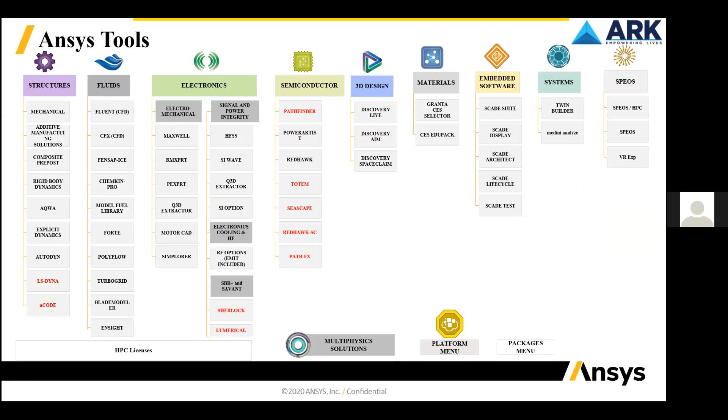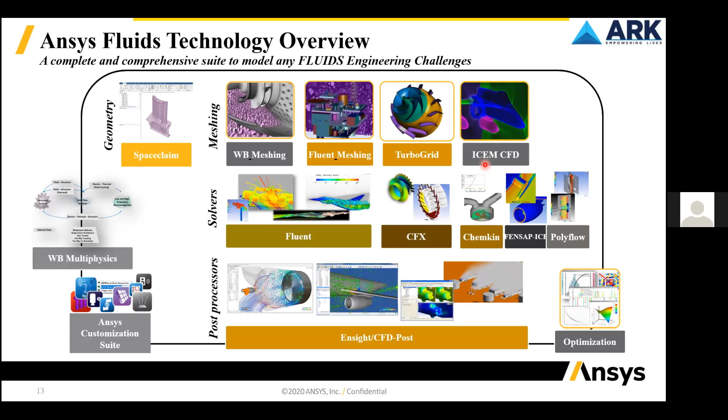And we can say that is one of the very best advantages that we have for using the workbench. Okay, then talking about the electric vehicles.

So for electric vehicles, engineering systems, there are multiple systems, or we can say the subsystems, are involved in case of the vehicle. So this simulation impacts all the critical areas of ground vehicle development.

Talking about the exterior, we have aerodynamics, aeroacoustics, thermal management, water management and soiling, then structural integrity. Talking about the interior, we can go for climate control or HVAC, then cabin acoustics, passengers comfort and safety, ergonomics, electronic reliability. So these are the various things that can be simulated for the interior of the EV.

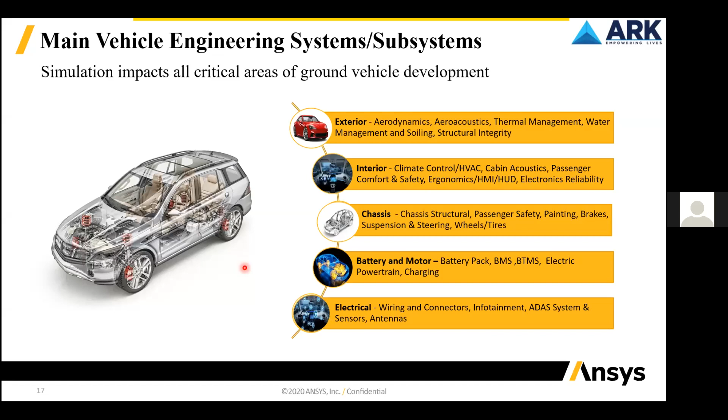Then we are going to focus on the exterior. Since today's topic is about external aerodynamics, right, so we are going to talk about the exterior part - where we have the simulation capabilities required to realize these benefits. So what are the benefits that we can get with the help of ANSYS for the simulation of the exterior part of the EV.

So first one, we have external aerodynamics - with the help of ANSYS Fluent, we can go for external aerodynamics simulation. Then again, we can simulate aeroacoustics problems in the same. Then we can go for thermal management, that is, we can simulate the battery for thermal management. I think we have this topic in tomorrow's session, so definitely we are going to discuss the battery thermal management system in that particular session, right? Then we have water management and soiling, then structural integrity. So these are the very important parts in case of the exterior system that any vehicle has.

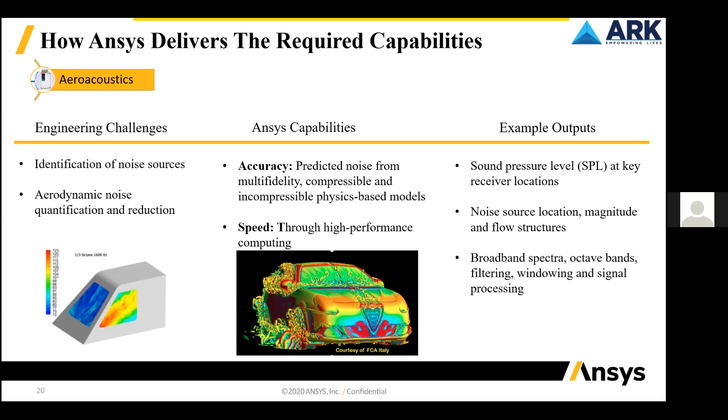Okay, then water management and soiling. Economic and repeatable water management and soiling needs to be done. Then quantifying the effects of water and soiling on sensor performance needs to be found out. So here we have the accuracy, where we can go for the extensive multi-phase model, with the help of which we can very easily simulate these water management problems.

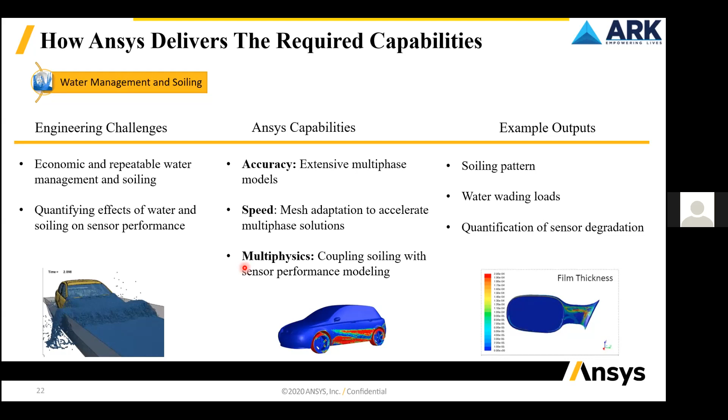And then here we can get results like soiling pattern, water wading loads, quantification of sensor degradation. So how those things can be easily found out over here.

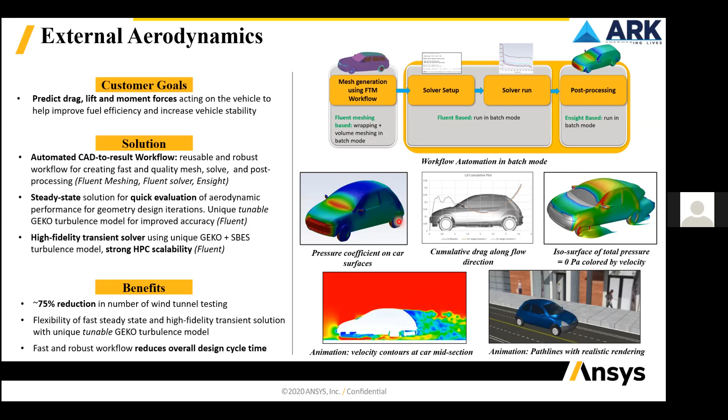Now how do we need to start the simulation in case of an external aerodynamics problem?

First of all, for the geometry, you may take a clean geometry into SpaceClaim, or if it's not clean, then you have to do the geometry cleanup in SpaceClaim. Then you have to set up the name selection for the different boundaries.

Then you have to take that clean model and transfer it into the watertight geometry workflow in Fluent meshing. Again, we can create a mesh for that model.

If you want, you can save the same mesh workflow for any future mesh edit or mesh automation. If you are going to work on multiple cases in the same way, you can save that particular workflow as well. Then you can load that mesh into Fluent and solve the problem.

Then you can save this complete simulation workflow in a journal file, so for future simulations it can be used as automation. You can directly call that journal and it will automatically give you all the inputs you have given.

Then post processing can be done in Fluent, and that can be exported into ANSYS Ensight or CFD Post, where we can do the post processing. Now I hope you understood the complete idea of how exactly we need to start with the simulation.

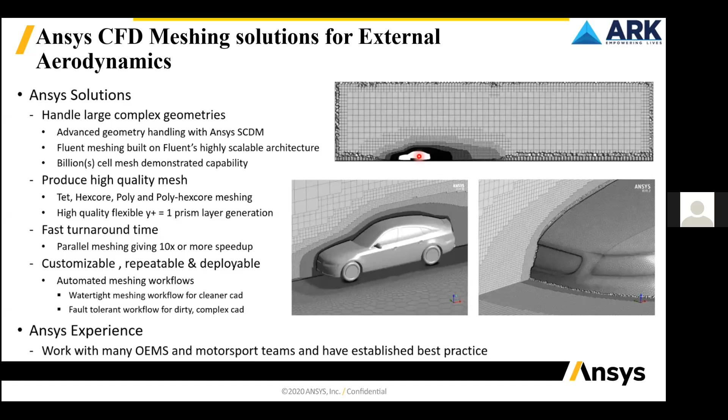So with this, I will give you a quick introduction about the Mosaic mesh. Just have a look at the video.

Are you getting audio? Can someone confirm? Yes sir, yes sir, continue. Okay, okay.

The world around us, its nature, its detail, its beauty, its design, all come through in an elegant and accurate expression of reality. And like great art, great engineering demands its own set of solutions to paint the perfect picture. Introducing Mosaic from ANSYS, solutions that optimize the mesh everywhere, solutions that don't compromise accuracy for speed. Automatically connecting any type of mesh using polyhedral elements for fast and accurate flow resolution without compromising the ability to place the optimal mesh in every part of the volume. This powerful new Fluent experience delivers higher quality cells 45% faster while requiring 30% less memory. Already the most widely used and dependable CFD simulation tool in the world. ANSYS Fluent now easily and quickly conformally connects any mesh type, complex geometries, and flow regimes, allowing you to explore more materials, more variations, more possibilities. And like all great works of art, simplicity, beauty, authenticity, they fit together perfectly and show us the promise of a new tomorrow.

Okay, so I hope you got an idea about this Mosaic mesh technology that comes with ANSYS Fluent, and it's really helpful to create a mesh. Now you can very easily transfer the model directly from SpaceClaim to this watertight geometry workflow. You can see this option where you can directly transfer the model to ANSYS Fluent Meshing.

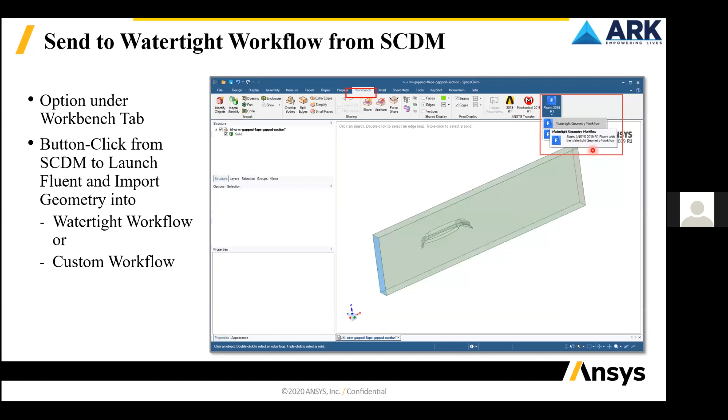Now here you'll be having two different task-based workflows: one for watertight geometry and another for fault tolerant geometry. Both are easy to use, with best practices enabled at each task. Whatever options are required to complete any meshing, in case of watertight or fault tolerant workflow, are already added there. You just have to follow the given steps and you'll be able to get a good quality mesh. The workflows are also customizable, so you can even add any other specific data if required.

Again, for no watertight geometries, for dirty or non-watertight geometries, it works with the help of wrapper technology. It actually encloses any holes or gaps, and automatically we get a complete watertight model in the Fluent Meshing itself. So there's no need to try to make it a watertight model separately.

Both workflows are efficient for parallel meshing. The only prerequisite for the watertight geometry workflow is that you should have a clean watertight geometry, whereas in the fault tolerant workflow, it is not required to have watertight geometry—if it's not watertight, that's fine too. It also automates with a Python based journal file, so you can save this as a journal file as well, making it fully automated.

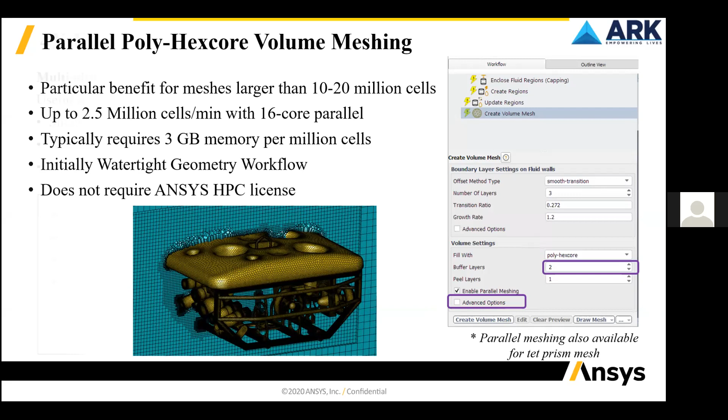I'm just discussing the EV section only, so whatever I'm discussing is specifically very important with respect to EV. Another part we have is the electric motor meshing.

For electric motors, meshing can be done 4 times faster. This is one of the important add-on parts in case of fluent meshing. Again, for battery simulations, it creates a very good mesh, and you can also do mesh copying.

If you see any battery pack, it consists of a number of cells. If you know electric vehicles, they have multiple battery packs in the bottom side. In each battery pack, there will be hundreds of cells, and those will be exactly identical to each other. So in that case, you can copy the mesh from one cell to another.

It works in such a way that you can create mesh as fast for hundreds of cells as you can for one. You just need to create a mesh for a single cell and copy it to the remaining identical cells. It's just copy and paste for the remaining cells, so very easily it creates the mesh.

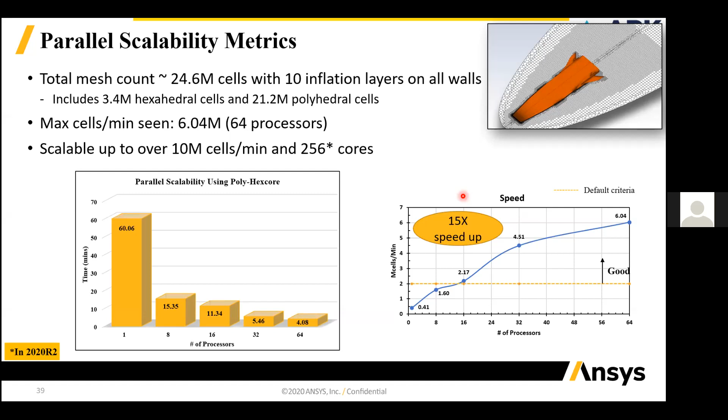Parallel scalability works really great for different problems as well, so you can get millions of mesh in very little time - 10 million cells per minute with 256 cores. If you've already worked on different problems, you'll understand the time taken to solve them, so this is really helpful. You can get 15 times faster mesh with ANSYS fluent meshing. This is one example where we are going to solve the same kind of example.

So you can see this is how the mesh is being created. You can see this particular layer here, where you will be having this mosaic mesh. Then near the wall you'll be having the hex polyhedral elements, and these are the hex core elements that you can see over here.

Talking about ANSYS Fluent again, which is the industry leading computational fluid dynamic software known for its advanced physics modeling capabilities, giving industry leading accuracy. It accelerates the processing from CAD to mesh to accurate results, with features that increase productivity while enabling more innovation, but never compromising on results. So definitely this is a really good tool that we have here.

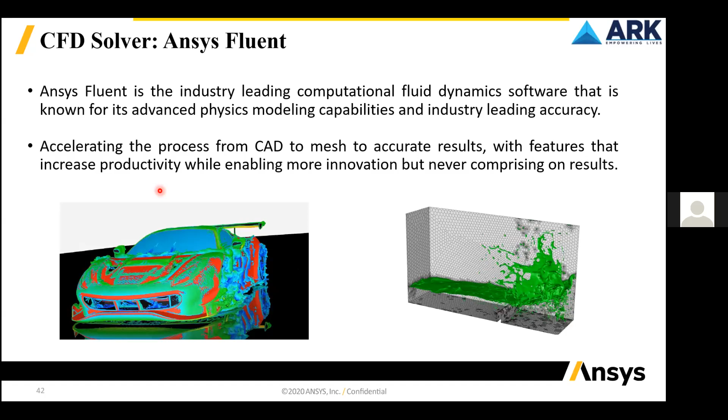Then talking about the different turbulence models in ANSYS Fluent that can be helpful for the EV side. Based on the type of problem we are considering, we have different models. Generally we use the one or two equation RANS models, that is Spalart-Allmaras, K epsilon, and K omega. All these models are available over here.

Again, if you wanted to go for unsteady problems, we have the scale resolving simulation methods, where we have LES, DES, SAS. So different models are possible for unsteady problems as well.

Then we have GEKO, as I told, that is the generalized K omega turbulence model, which is very important over here. This GEKO, developed by ANSYS, is a new turbulence model family, from the family called generalized K omega model, with the goal of turbulence model consolidation.

GEKO is a two equation model based on the K omega model formulation, but with the flexibility to tune the model over a wide range of flow scenarios. This is very important in case of flow, or we can say results in the critical area, so definitely that can be helpful.

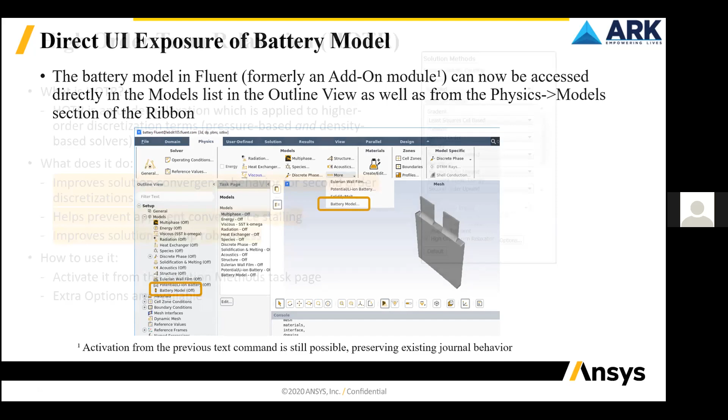Again, then high order term relaxation, that is HOTR, which is applied to higher order discretization terms, that is pressures - it can be pressure based or density based. What it does is improve the solution convergence behavior for second order discretization, when we go for second order discretization in the solution method.

Again, it helps to prevent apparent convergence stalling, and improves solution startup robustness, giving more smoother results we can say. It can be directly activated from the solution methods task page, and there are some extra options also available inside this.

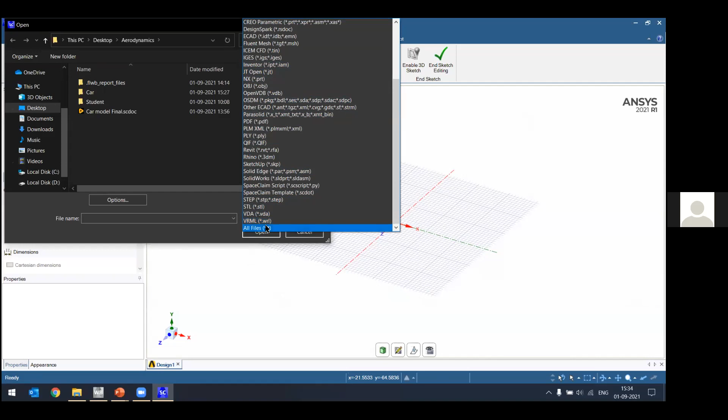So to start, I'll go to the file and import that file. You just need to go to File, Open, and in the open dialog, first change this filter from .scdoc, which is the SpaceClaim file format, to all, because we are importing the standard files, not from SpaceClaim. Select this 'all files' option, then just browse to the folder where you have downloaded it.

I have the file downloaded over here, so this is cad_c_car.x_b, a parasolid file format. Select this and open it. As you can see on the bottom side, it will open that complete file over here, the status shows it is importing.

Okay, so the file is imported. You can see this is the car model that we have over here.

Now first of all, we need to understand what could be the different data losses over here before starting repairing that particular model. So here we are going to create a complete watertight model, then create an enclosure around it, and then we'll be moving to the meshing.

Let's see over here. If I'll just go to this repair tab. Before that, if you see in the structure side, here we have two surfaces over here. First thing what you need to do is observe where these are located. You can see this surface is reflecting separately, and this is another surface, right? So first thing you can observe that both the surfaces are splitted.

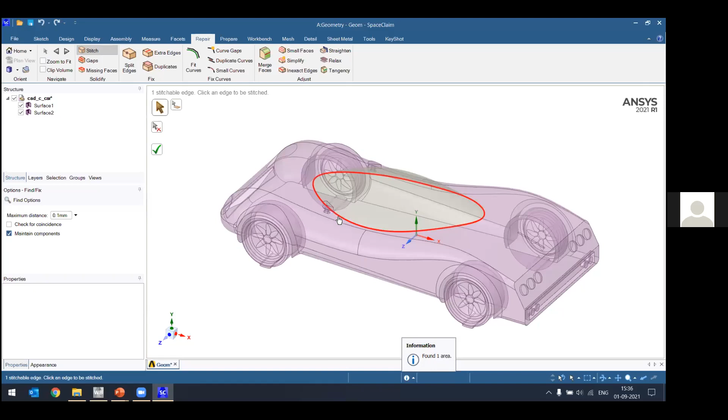So you need to stitch them together. For that we use this stitch option. Select the stitch option, and it will show you found one area. Just click on it, or click on this green tick also. Both will repair this model. Now you can see it is repaired, and here you can see only a single surface. So the model is stitched.

Then check for the gaps. Here you can see again it is saying found 3 areas. Select the first one, repair it. If you want to repair all at once, just click on this green tick, or if you want to repair one by one, select one by one like this.

Once the model gaps are filled, then check for the missing faces. Here you can see it is showing found 6 areas where faces are missing. First one is over here, you can see it will start adding the faces. Second one is over here, and this face is missing. When you will add, you will get to see the face will be added.

Similarly here also you have to add the face, then right side, and here also a small gap will be there. I hope you can see this gap, so this is the face missing over here. And then the last one is over here.

As you can see, when I have added all the missing faces, the surface body is converted into a solid body. So we have successfully repaired all the faces.

Now what we need to do is we have to call the wing shape as well, but before that, still we have to repair this. Next one is the split edges, so you can see there are 15 edges which are splitted. So what exactly does this work? If we don't repair the model, what will happen? See, the meshing that we are creating will not be up to the mark. First of all, if it is not a watertight geometry, we will not be able to extract the fluid domain, so that is the first thing. Now second thing is, even if it is watertight but still having some other issues like a split edge or extra edge, that will lead to some bad quality mesh. So we have to repair that model before going for the meshing.

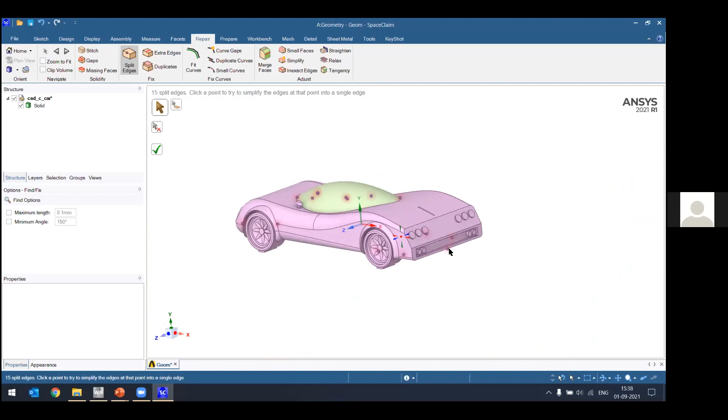So here you can see we have to repair the different split edges. I'll show you one by one. This should be a continuous edge, right, but it is splitted into two parts, so just combine it to one. Again over here, you can see it is splitted at this location. I'm just showing you, otherwise you can just go for all at once. Here also it is splitted at this location, also it is splitted, and then over here, and then here.

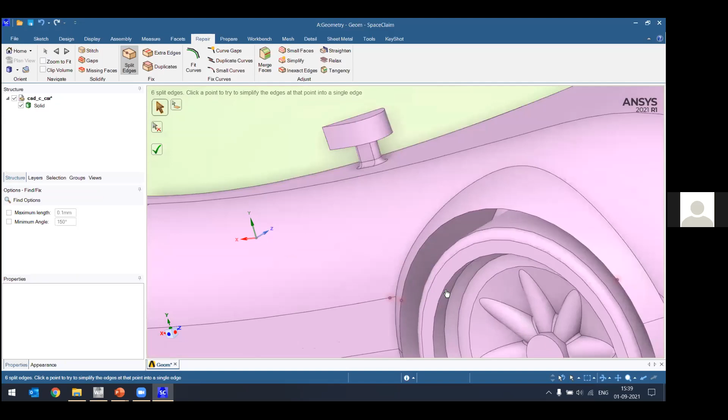Okay, all are repaired except this one, so it is not repairing. For now, just leave it as it is. Okay, then go for the next, that is extra edges. So no extra edges found. Any duplicate face? No duplicates are also found. Okay, so we have completely repaired the model.

Now we have to add the wing shape to this particular model. So for that you just need to go to this assembly and go to this file, so you can import another part, that is wing. Select this CAD wing and just open it. Again, it is a parasolid file format.

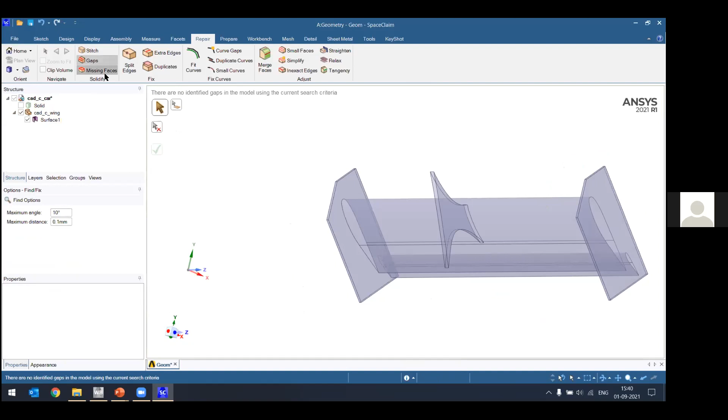So when we are importing it, again we have to repair that particular model as well. So I'll hide this car body, and I'll just show you this wing shape over here. Again we have to go to the repair and we have to repair the wing. So stitch, no gaps are there, missing faces, one face found. Just add it, and now you can say it is repaired.

But if you see this specific surface of this added surface, that missing face which is added, if you see how it looks like, you can see it is not a straight one. It is like this kind of wave shape it is taking. So that's why we have to first even repair this as well.

So for that, first of all we have to check other parts. No extra split edge, no extra edge, no duplicates. Now go back to the design.

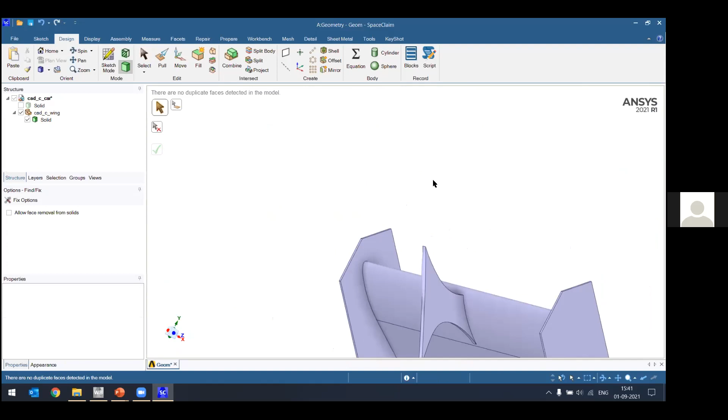Now what we have to do is create a surface or plane with which we'll replace this particular surface. So we have to replace this surface first of all. For that, first of all, we have to create a point. Now we can see here in this particular location we have 2 points, and at the bottom we'll create a point, and on this edge at the middle, or anywhere on that particular line.

Now we have to select a plane. We just don't need to create a plane, we have to build a plane. So select this build plane option over here, and then select these points so that you can create a plane which is passing through those points. And now third point, select. Now you can see this dotted line over here, so just select this dotted line so that the plane will be created passing through those 3 points.

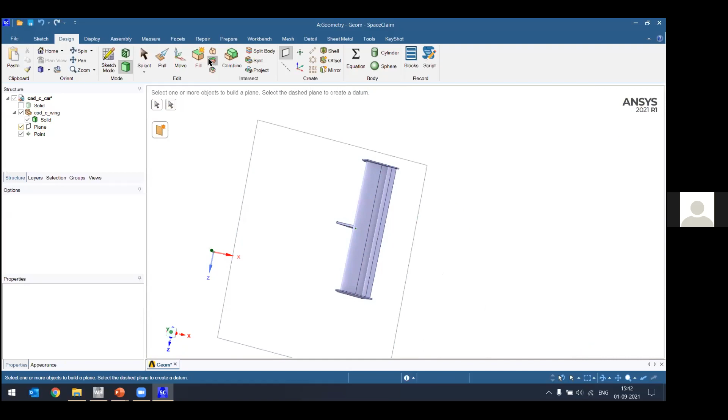So you can see the plane is created over here, and now you have to use this replace command. Select this particular shape that we wanted to replace, and then select the plane to replace. So automatically it will replace that. Here you can see target faces were replaced. Now hide the plane and hide the point as well, and here you can see it is a proper straight shape that we got.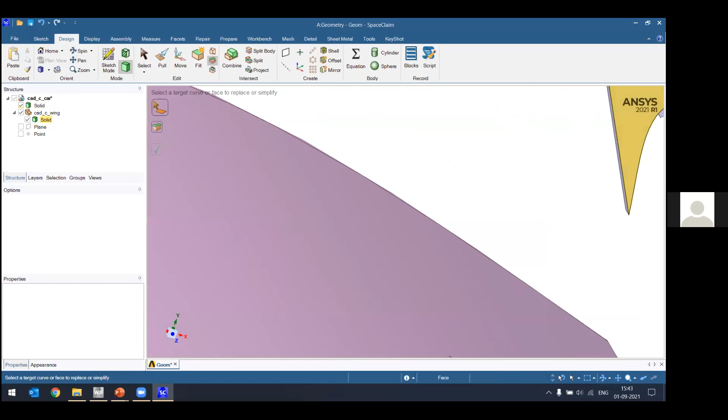As you can see over here, it is done, model is repaired. Now we have to attach it to the car body. Again for that we have to attach this particular part in such a way that this rectangular shape will coincide with this particular shape. This is how we have to attach it. So for that go to the assembly, sorry, not assembly.

First of all we have to create a plane along this rectangle again to make it align with that particular plane. This surface should be aligned to that particular plane. So again here also I'll just hide this wing shape. Here also we have to construct the plane.

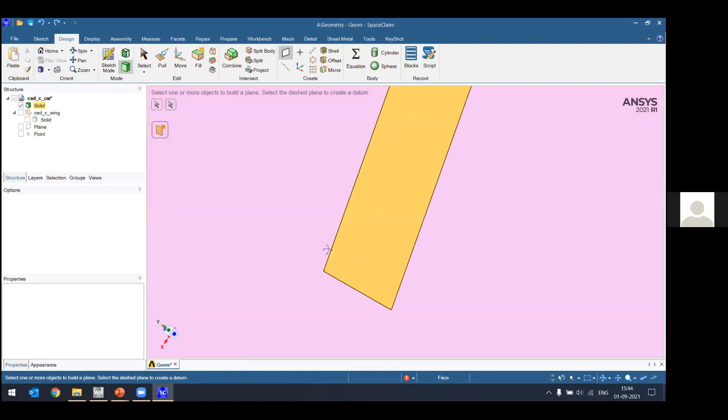So go to the plane and select the points, sorry, we have to select the construct plane option. So go to this plane option, go for the build plane, and then select this particular point, then this point, and then 1 point from this side. Okay, it's not detecting, so first of all we have to just make a point over there. So the point is created over here, and now, sorry, not created here.

And now just go for build plane, select this, so select the point, another point, and this point. Okay, so plane is created. Now sorry, plane is not created. Select this dotted lines to create a plane. So you can see plane is created.

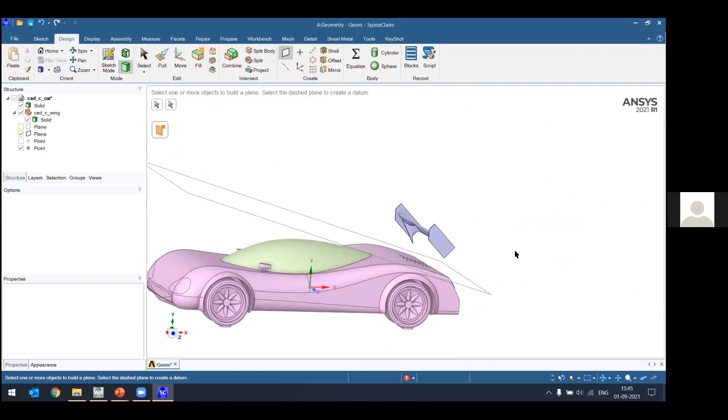Now again view this model and then go to the assembly and select the align option and select this surface and align it with the plane. You can see it will be aligned. Right now we have to move it and we have to position it exactly at this particular location.

So select the move command, triple click on any surface to do the complete body selection, then select the anchor and change anchor position to this location. Direction should be along this particular plane, right? So select the edge so that it will be along there. Now select the up to and select this particular point.

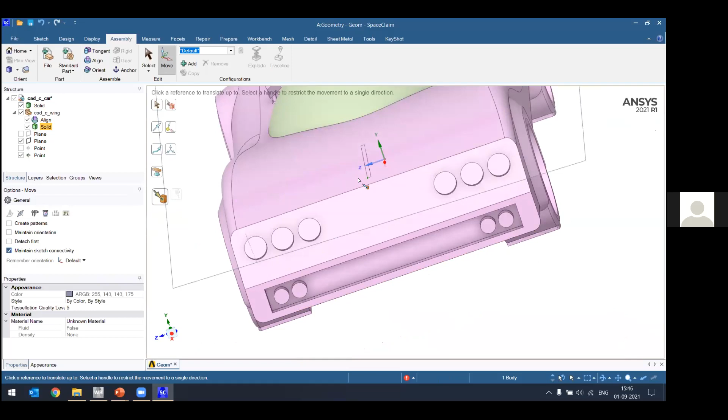You can see it will be positioned over here. Correct. Now we don't need that rectangular shape, so I'll just hide this plane. Select this particular shape. You should be in select mode.

Delete it. That patch should not be there. View the model, and now both are combined together, or we can say we have to make them as a single body now. So I don't need these points anymore, I'll just delete them.

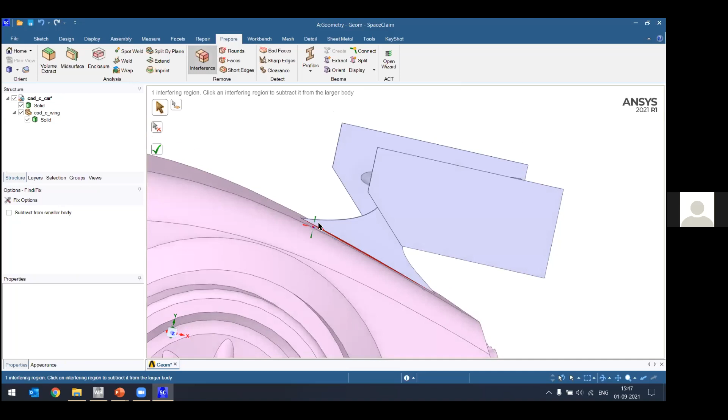Okay, all are deleted. Now go to prepare, then click on interference. Now when they are combined, you can see this shape of the wing, this bottom side we made it straight, but if you see this shape is not straight, it has a little curvature. So though we have aligned it at the points, in the middle it is merging with the another body.

So we have to remove the interference material. Just click on it and it will be removed. Once it is done, go to the prepare section and go for the enclosure. Sorry, not before that, we have to combine the model. Select the combine option, select first body, take combine option and select the second one. So you can see now it is combined.

I don't have anything over here, I'll delete this. So you can see the single body over here. You can rename this to car.

Okay, rename it car model. Done.

And now we have to create an enclosure. So go to prepare, select enclosure option and select the body.

Now we can give the dimensions. Let's say we'll give in the sides. I'll not create a much larger domain, so that the time taken for this solution, or for even creating mesh, should be very less. We'll try to keep it as less as possible.

So I'll just give it as 1500 on the sides. On the front and back, let's say I'll give 4000, and then on top and bottom again let's give 1500. This I'll give as 1000 only on the sides.

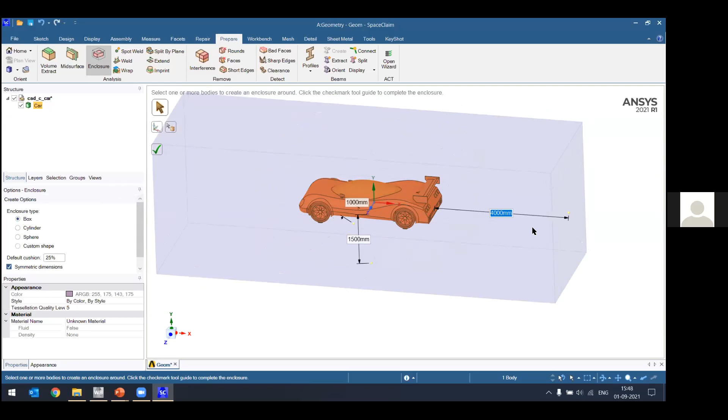Okay, so this domain will be created. Now I just need to say okay to this. Now as you can see, the model is created. Now in the front direction, not necessarily should you have that much domain, so I'll just remove it. Again, there is no thumb rule to create any domain for the external flow problem.

Generally if you refer to any paper, they generally say it's supposed to be 8 to 9 times the actual model, but again it varies when you are going with a high velocity. So that also you need to check out.

Now we don't need the car model, so right click on car model and click on suppress for physics, so that will be removed. Now as I told, this edge was not repaired, so again go to repair and

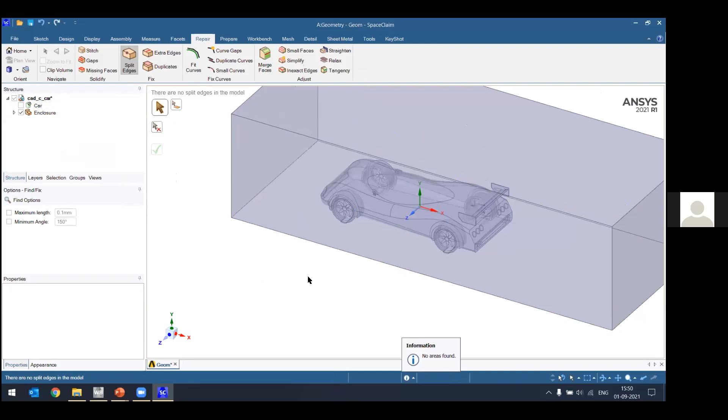check for the split edges. Now for this domain it will be repaired easily, so just repair it. Now if you will see, it will not show you any split edge over here. Done. This is how we can create an enclosure.

Now this is the complete domain over here, and once the model is repaired, we have created an enclosure. Now we have to create a name selection.

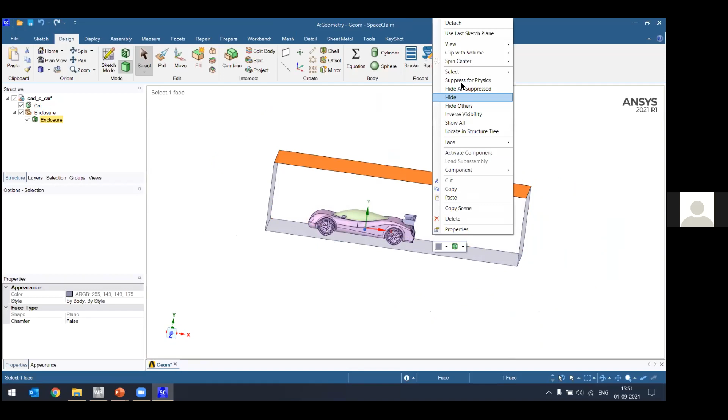Okay, first of all we'll give the name selection to this complete car model. Okay, so I'll just hide all the faces. Hide face. This will make it done. This also will hide. Okay, so it's selecting all.

As you can see, I'll just go from the front side and do a box selection and select all the faces. So go to groups, create name selection, and we'll name this as car. Okay, and I can right click and show all, so it will show all the bodies.

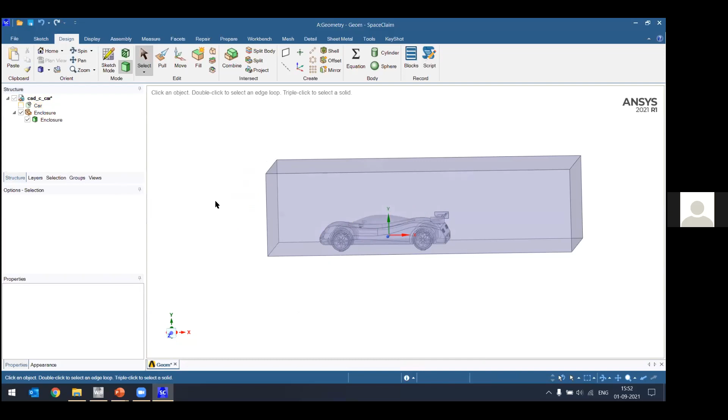I'll hide the car model again. And now this is the inlet section. So select this, go to groups and again create name selection. This is inlet. And then this is the outlet, select it.

Then these are the symmetry faces. So those will be in contact, like those will be open to atmosphere, so I'll name them as symmetry. Okay, and then this is the road or wall, whatever you want, you can name this road surface. Correct.

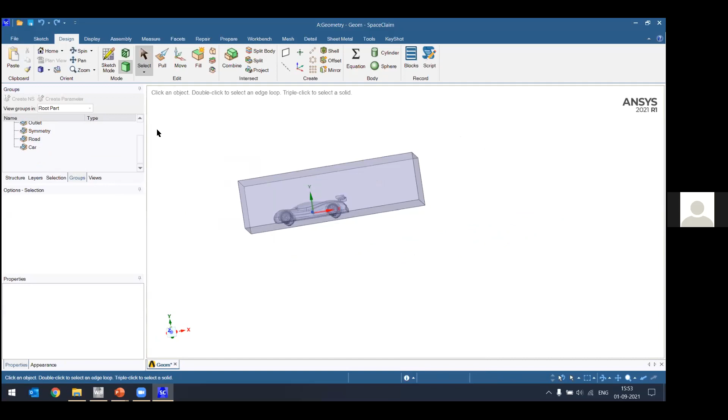Okay, so all names are being given as you can see over here. And if you want, you can save this car model, so just click on save as. Let's say we'll save it on desktop.

So this is, we are saving in a specific file format. I hope it is clear till this. Any doubt, any question in the specific part? So now we are ready to move to the next, that is creating a mesh. Any doubt?

Okay, so we'll move. We have to take another component system, that is Fluent with Fluent Meshing. So if you see over here, this is Fluent with Fluent Meshing. You can directly attach it and directly transfer the geometry, but there is an issue, we cannot edit the dimension units. So I'm taking it separately and I'll directly launch it, then we'll import the model.

Okay, double click on mesh to launch the meshing tool. Here you can see you will be able to see the dimensions. By default it is 3D, you cannot solve or create a fluent meshing in 2D. Enable the double precision for better accuracy, go for 4 cores or however many cores, up to 4 it is supported for normal license. So I can give 4 cores and start. So you can see it is starting Fluent.

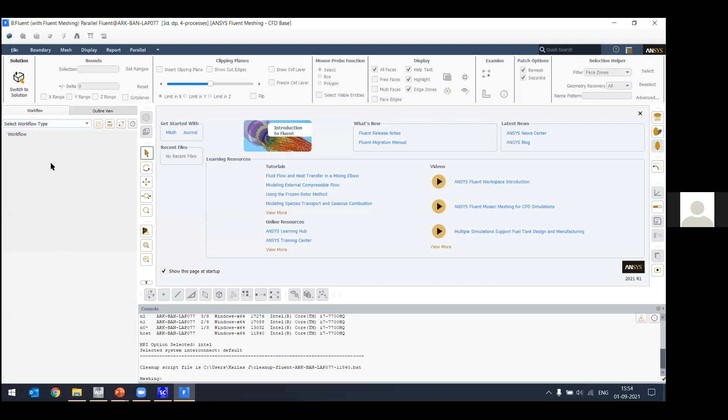And now we have to select first the workflow over here. As I told, we have two workflows. If you see in this, we have watertight geometry workflow and fault tolerant workflow. If you want, you can create any new workflow as well, so you can make a guided workflow as per your problem. That is what is possible with the help of that.

Okay, then if you see, the GUI is similar to Fluent. On the top side you have the different options available. This is the console, this is the graphics window. When we'll import the model, that will be visible over here. And this is the outline of workflow view, here you'll be getting the outline of the workflow when we'll select the workflow. So we have to select the watertight geometry workflow, just select it and you can see you'll get the complete workflow over here.

Okay, now first one is import geometry. So select this, and the file format we are going to import is a CAD file, and units are set in mm. If you want, you can change it, but I want it in mm, so I'm just keeping it.

Then go to this browse option, that is the 3 dots, and import the model that we have saved. Now I have saved the model on desktop, whatever CAD file we have. So just browse that, go to the desktop, and here you can see this Car.scdoc. Just open it and just click, it will be directly imported over here.

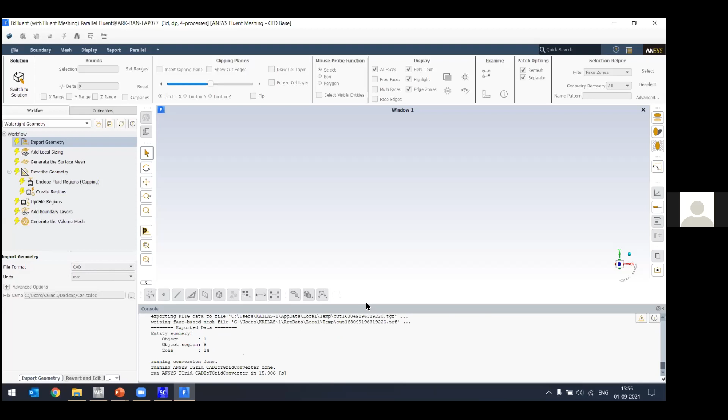Okay, so as you can see, the model is imported over here, you can see the complete enclosure that is visible. First option, import geometry, is done, so here you will get a green tick. Next is add local sizing. If you wanted to add sizing at any specific location, you can say yes, and select the locations where you wanted to add the sizing, and there you can add it. I just don't want to because it will take more time, so I'll say no to this and we'll move further. Say no and click on update, so it will update the same.

And the next one is to generate the surface mesh. Now if you see over here, it will show certain dots, these are the preview where you'll be getting the larger size of elements in these particular locations. So you can see one that you are getting over here as well. Okay, so that you need to understand.

Let's say I'll take 1.2. You can change the angle of curvature to 12. Again, it gives similar options to what we have in ANSYS meshing or workbench meshing, that is, if you wanted to capture the curvature and proximity, so you can select accordingly. Once it's done, I'll just keep 200 itself, otherwise it will take more time.

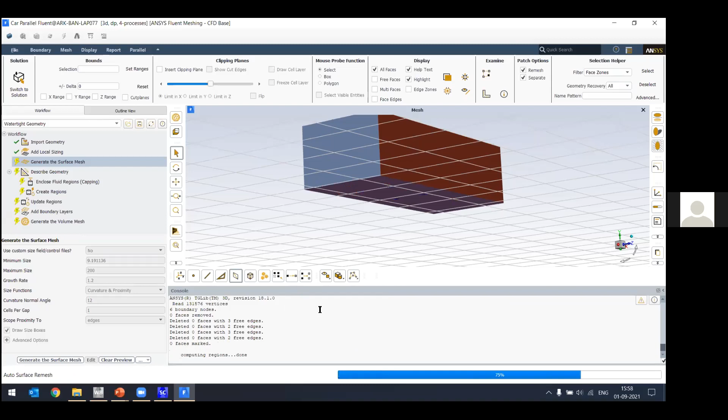So first of all it will create the triangular elements, that you can see. Elements are created, as you can see over here. If you want, you can just clip the plane and then observe. I'll just clip it. Okay, it's from this side, so I'll just revert the flip, so you can see triangular elements are created.

This is the surface mesh that it has created initially, that you can observe over here. Now if you give even a smaller size, it will create even better elements, but since we have given a sizing of 200 mm, you can see this is a little larger. If you want, you can refine it further as well.

So the next step is to describe the geometry. Here you can see the geometry. The first option in the geometry type is that the geometry consists of only solid regions. Like in any case, if you just wanted to create a model and create an enclosure or a volume here in meshing, that is also possible in case of fluent meshing, so that's why it is asking these options. So we can see this model has only fluid regions, no voids and solids, or if the model has both solids and fluid, then you have to select the third option.

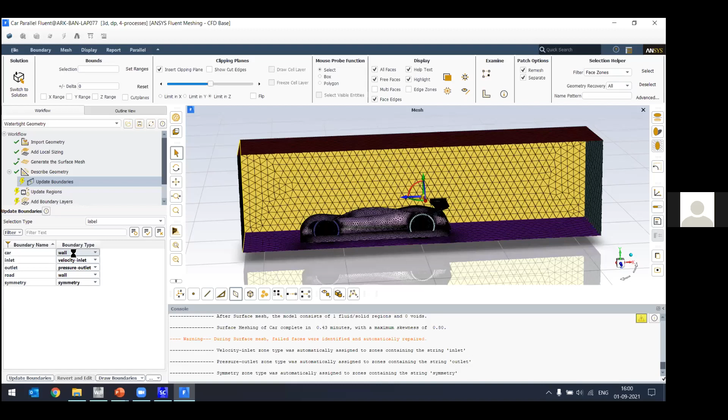So the first one is the car surface. If I remove the clip, this is the car surface. When I take the cursor over there, you can see it getting highlighted. So that will act as a wall, right? So you have to define the boundaries.

So then inlet will be velocity inlet, as described, and outlet will be the pressure outlet. Road surface will also act as a wall, and the symmetry - these three surfaces will be exposed to the outer domain, so there is no restriction to the flow in these three directions, right? That's why I have named it as symmetry. So that is symmetry done.

Click on update boundaries. If anything needs to be changed, you have to change it over there. But I have given the name selection in such a way that the software automatically detects it. Instead of inlet, if I just name it 'in', it will still detect it, but not as a wall surface. So that also you need to keep in mind while giving the name selection, as it actually reduces a lot of effort.

So then the next one is update region. This enclosure, the complete enclosure that we have created, is completely a fluid domain. So just click on update region and done.

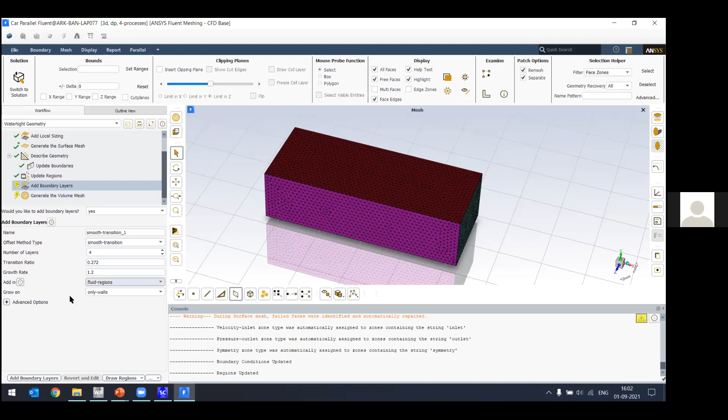Then if you wanted to add any boundary layer mesh, that is the inflation layer we add to capture the boundary layer formation near the wall surface - let's say I wanted to create 4 layers, and where we wanted to create it, let's say only on the wall surfaces.

So which are wall surfaces? The road and the complete car model. So only along those it will create an inflation layer. Just click on add boundary layer and then go for the last step, that is generate the volume mesh.

So here, to generate the volume mesh, we have to select the type of elements. If you see over here, we have types: polyhedra, polyhexcore, hexcore, and tetrahedron. So here we will create polyhexcore mesh. Select it and just click on update.

If you want, a lot of advanced options are available in each. You can update the boundaries, add additional things, but I'm just going with the simplest one so it should not take more time. So just click on generate the volume mesh, and it will create the volume mesh over here.

So this is how very easily you can create a mesh with practice. Even a person who is not from the simulation background can also very easily create a mesh with very good quality.

Can we have local control over a mesh in this type of meshing using Fluent? Yes, this is local meshing. Here you can add multiple local mesh settings at any location, faces, edges, or bodies as well. But it will take more time, so I have not given it.

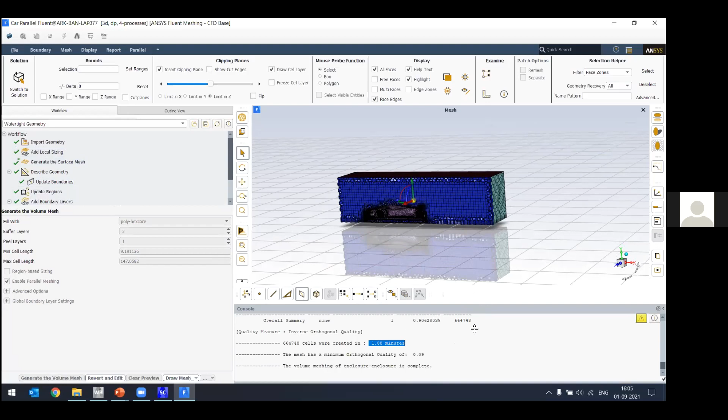Okay, so you can see the mesh is created, almost 6 lakhs 64,000 elements are being created, within 1.88 minutes. So you can see how fast it works. If you have used ANSYS meshing or any other tool, you will get an idea how exactly it is working, and this is how we are creating the mesh over here.

You can see these are polyhedral elements that it has created on all the surfaces. As you can see, on all the surfaces you will be having the polyhedral elements. On the wall surfaces, only this car model which we have named as wall, and the bottom road surface, there you will be able to see the inflation layer. You can even check it out.

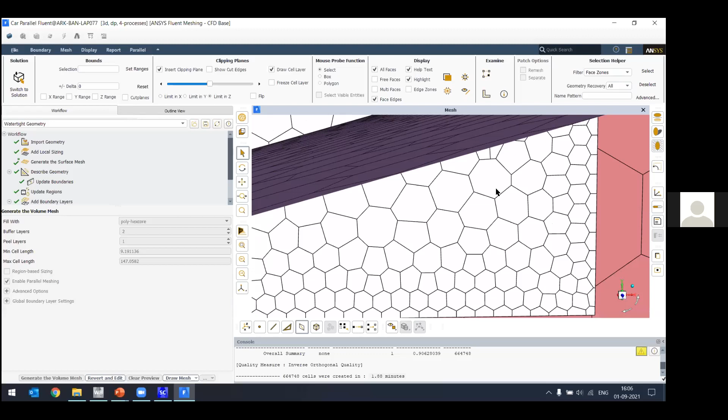This inflation layer is also visible over here. These polyhedral elements, these are the hex core elements or hexahedral elements, and this is the mosaic mesh that you can see in this particular part. This mosaic mesh definitely gives you good mesh quality as well.

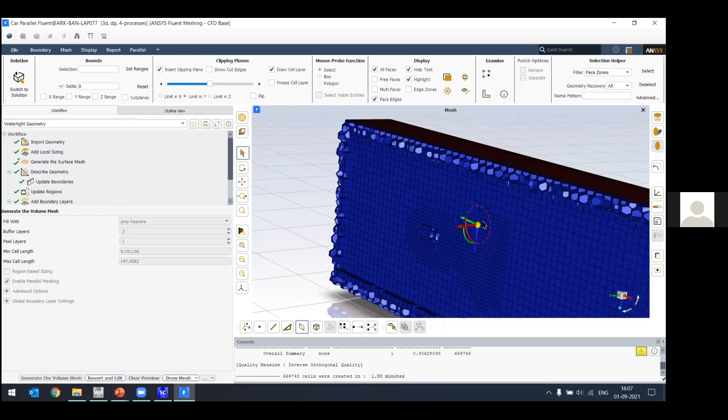I have not given the best quality settings, but you can definitely go for better mesh quality. Since it should take less time, I gave a very coarse sizing, but you can definitely try it out and it will give you very good mesh as well. You can take different cuts on different sides and check it out like this. This is how you will be getting a very good mesh quality over here.

And once this is done, it is like a single window workflow from meshing till the final result section, right? So once this is done, you just need to click on switch to solution mode, and it will switch to Fluent, where you can go for the solution, solve the problem, and find out the results.

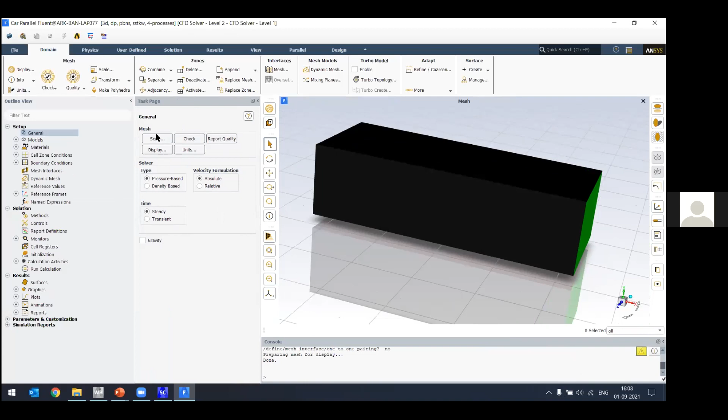First of all, on the left side you can see the outline view. Again, the GUI is almost similar. Here you have the console where you will be getting the different iterations, error messages, everything will be visible in this section - errors and warnings. So this is the graphics view. These are the different tools, or tabs, that we have over here. We just need to follow this workflow again, the outline view, to complete any simulation. Additional options are available in the various tabs over here.

Again, starting with the general settings. First of all, you can just scale the model. Here I don't need to scale it, I'll just change the unit. If you want, you can specify the scaling factors and scale it. I'll just change the unit and close it.

Then perform the mesh check, and once it is done, I can view the report quality, and if quality is below the acceptable range, you will be getting a warning over here. You need to improve the mesh.

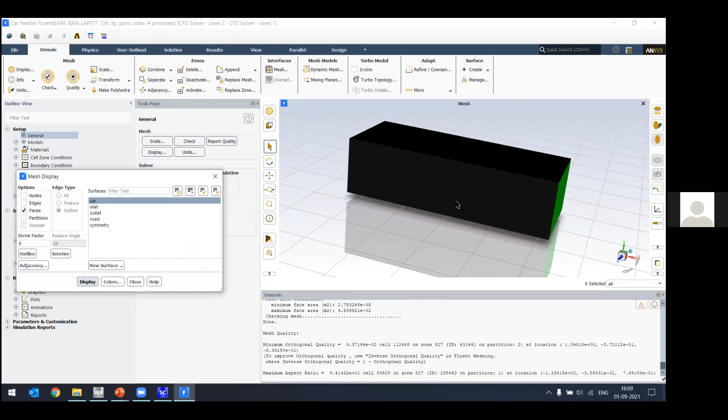Then in display, you can view all the boundaries one by one. So this is the car model that we have named. Then this is the inlet section, which you can see in blue color. This is the outlet in green color. Then this is the road surface, that is the wall, and this is the symmetry surface, in black color. So these are the different boundaries that you can see.

Then we'll solve it for a steady state problem with very low velocity. So we'll go with the pressure-based solver with absolute velocity and steady state. Enable the gravitational effect in the negative y direction.

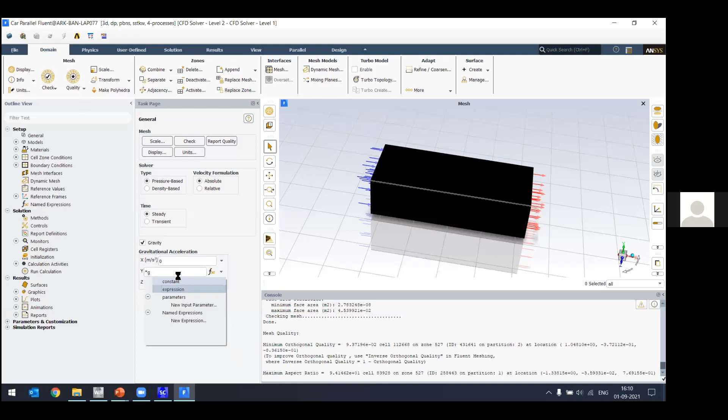Now it supports the equation, so you just need to put minus g - sorry, minus g, so it will automatically... it's not taking it, for that you need to enable the expressions, then you have to give minus g like this. Otherwise you can give the constant like minus 9.81 along the y direction. So in the downward direction we have to leave it.

Then go to the model. In this case we'll be using the viscous k-omega model in the turbulence models. Apart from that, as I told, various models are available based on the problems, like multiphysics - we have heat exchanger, species, radiation. Then for battery, we have battery models, lithium ion battery models. So different models are available. For this, for external aerodynamics, we just need to change it to k-omega GEKO.

As I told, this GEKO k-omega model that we have, you can even go for the curvature correction, corner flow correction, so that will tune the results for better accuracy. So you can just enable this and say okay. So you can see the generalized k-omega model is enabled.

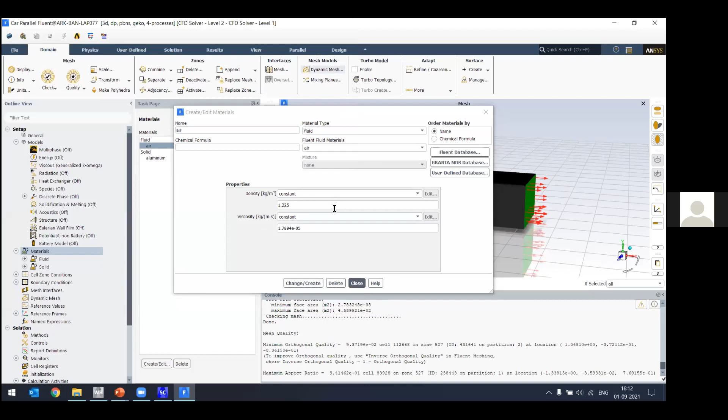Material is default, that is air material, right? So if you wanted to add any new material, you just need to go to create/edit, and in the Fluent database you will be able to see the list of fluid materials. We have here 565 fluid materials available. Along with that, the Granta MDS database is also added, where you have access to a few solid materials - no fluid materials are available in the Granta library, but various solid materials are available. We don't want to add any materials, so I'll just keep it as it is.

Then go to the cell zone condition. This is our enclosure for which we need to assign this fluid, that is air. So just edit this - here we can change the material. Now for this we have the default material, so no need to make any changes, we can keep it as it is. Just apply it and close.

Operating conditions - apart from any room condition or standard conditions, if you wanted to change the operating conditions, you can just go to these operating conditions. Here you can see the pressure is 1 bar, that is 101325 pascal.

Gravitational force that we have already enabled, and the value is given. If you wanted to change the operating density, that also can be changed from here. I don't want to change anything, we'll keep it as it is, so I'll just cancel this.

Now, boundary conditions. As you can see, the first one is the car model. That will act as a wall surface, as you can see in the types, it is wall. So just click on edit it.

We'll consider it a stationary wall with no slip condition, like how we test in a wind tunnel. The model will be stationary and air will be flowing around it, so same way we are testing over here. Stationary wall with no slip condition, we can provide a roughness value as well on the surface if required. Apply it and close.

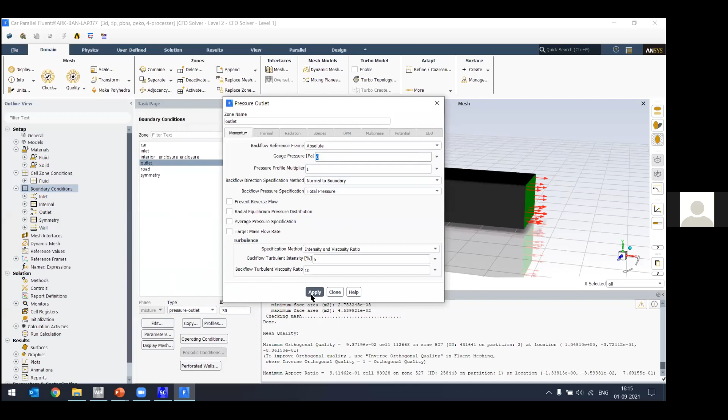Then road, so the road surface will also act as a wall, so you will be able to see the boundary layer formation on the road surface as well. Here you can see the type is wall. Again edit it, same condition that we gave for the car, similarly we are going to apply it to the road surface also. Stationary wall with no slip condition. Apply it and close it.

Then symmetry, again for symmetry you just need to make sure that the type is given as symmetry, so that there should not be any boundary layer formation on the symmetry surfaces. You cannot edit anything, just need to see the name. You just need to make sure the type is symmetry, that's all.

We have given all the boundary conditions. In the reference values, you can select compute from inlet section, so that all the initial gauge values or reference values will be taken with respect to the inlet one. In the reference zone, you can select the complete volume, that is the enclosure.

Then in the methods, as I told, we have different schemes: SIMPLE, SIMPLEC, PISO, coupled. Generally we go with the simple and coupled method for general purpose applications. So here we'll go with coupled, so that helps you get a faster convergence. Select the coupled scheme again. High order term relaxation can be enabled for more accuracy, so we can enable this.

Again, in the solution controls, you can go for the under relaxation factor. If the solution is not getting converged, then you need to change this parameter, so that can help you get a convergence faster. Then report definition, here we can track different force results like drag force, lift force, moment, momentum, so forces can be tracked over here.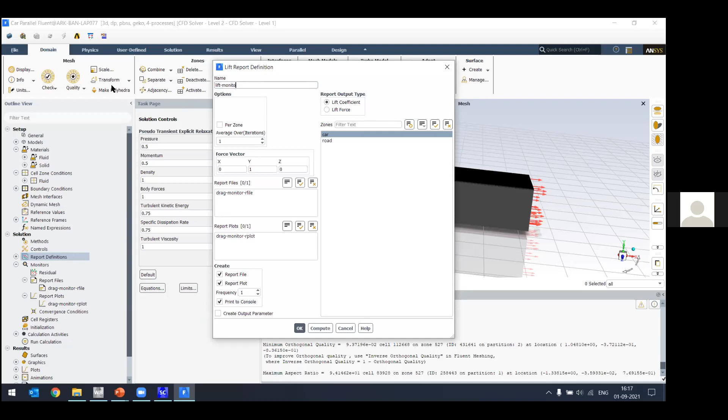Okay, say okay to this and close. Both are added, then residual - if you want, you can go for higher accuracy as required. I'll keep it to 10 raised to minus power 3, so we get a faster solution. You can generally go with 10 raised to minus power 6 or 7, until we're getting stable results - that's also possible based on the time you have.

Then go to initialization. We can go for standard initialization and compute from the inlet, so initial guess values will be taken with respect to the inlet. Click on initialize, so it will initialize the model, and once done, go to run calculation and give the number of iterations.

Let's say I've given 1000 iterations, and click on calculate. Once the solution is completed, we'll get the drag and lift coefficients on the car model. As you can see, the iterations are starting.

We'll start getting the iteration values over here, along with the residual plot, drag monitor, and lift coefficient monitor as well. I've given 1000 iterations, but we'll just solve it for 100 iterations so it shouldn't take more time.

You can see the first iteration is completed. This is the residual - it will start plotting. Drag monitors and lift monitor will also start plotting. The number of cells is 0.66 million mesh, so it will take a little time to solve the problem.

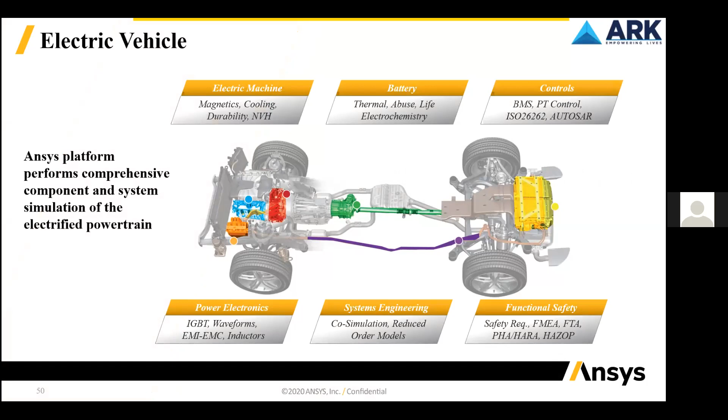Apart from that, there are various research areas in the EV section. In electric machines, we have research areas. Then for battery controllers, power electronics, system engineering, and functional safety - in all these we can do simulation, and ANSYS platforms are available for all these simulations.

In EV we have a lot of electronics designs, so electronic components are there, and for that thermal management is very important. You can go for thermal analysis of those particular components with the help of ANSYS. Then, how can we learn ANSYS?

We have ANSYS Innovation Courses, which are freely available for everyone to learn, to understand various concepts and different theoretical aspects across different engineering subjects. These courses are developed by different industry professionals, keeping different levels of students in mind, so it's freely available. You just need to Google ANSYS Innovation Courses, enroll, and complete them. Apart from that, another tool we have is ANSYS Learning Hub.

It is a learning management system and centralized knowledge portal that offers rich learning resources and a continuous learning experience to ANSYS customers across the portfolio. Here you'll have a campus view, as you can see, with buildings for each physics separately, and you can visit the building you want to learn from.

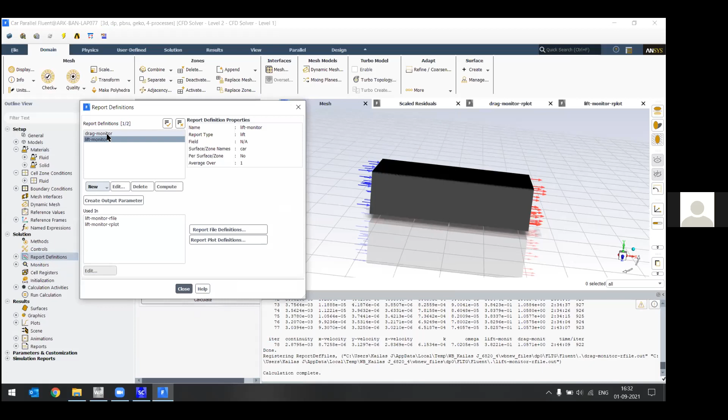Okay, once we have stopped, you can see I have completed 78 iterations, and now we want to find out the drag and lift coefficient. So you can go to this report definition again, select the drag monitor first, edit this, select the drag monitor and click on compute - it will show the result of how much drag we are getting on the car model, here you can see CD. Similarly for the lift monitor, click on edit and click on compute for the lift monitor - sorry, I think I closed it - so here CL also you will be getting. This way you will get the drag and lift coefficient results.

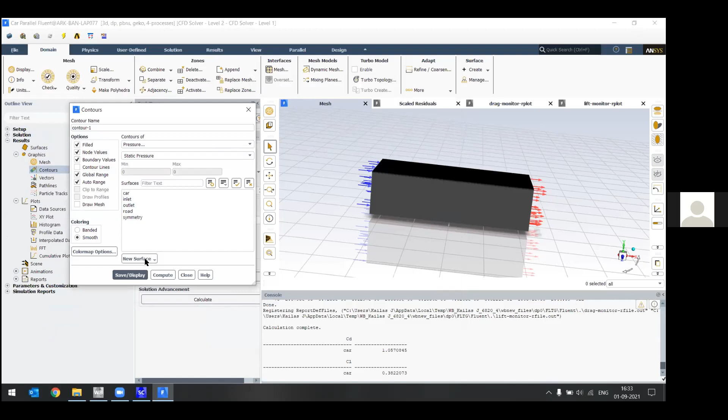Apart from that, you can check out different results - let's say go to this results part, it's possible in Fluent itself. Go to contours, and if you want to plot a contour, go to new surface, and I'll create an ISO surface of constant mesh along, let's say, the z direction, exactly at the middle, that is at 0,0. Let's create - see, this is the name of this contour. We'll see the static pressure on this contour, click on display, so you can see the pressure contour over here.

Okay, and then similarly we can see the velocity contour as well. Here you can see the maximum vortex shedding over here in the back side. Similarly, if you wanted to check further results, you can go back to the workbench and just add the CFD post to view the results.

I'll just make this as up to date, accepting the interrupted solution. Then go to the CFD post, where you can again find out the contours, streamlines, etc. But here in this particular simulation, the main focus is on drag coefficient and lift coefficient, which we can very easily calculate as I showed.

So the model is importing. This is the CFD post. We have another tool called EnSight, where also you can do the post processing, maybe for multiple physics together. So that is also possible.

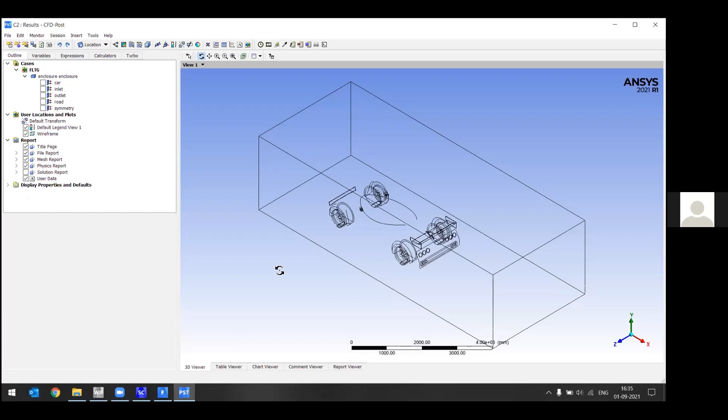It's loading the model. Okay, it's imported. You can see this is the car model, and we can see the various contours around it.

So you can just create a plane here also. The plane should be along XY at Z equal to 0. That is exactly at the center we have created a plane. Now on this plane we can observe the various results, like we can see the vectors on plane 1.

So you can see the velocity vector. This is how the vectors are formed, or velocity vectors can be observed. As you can see, there is backflow in this particular region, and splitting. You can see the direction is changing for the airflow. Then you can hide this.

You can go for the contours, add the contours, and check it on plane 1, like the pressure contour. You can see this is how pressure is varying inside this complete domain.

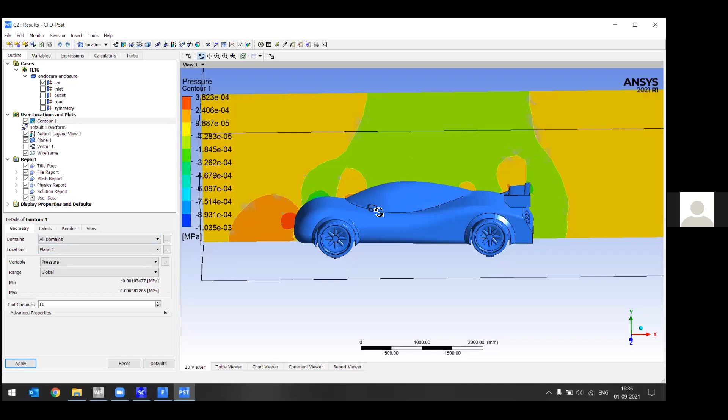Definitely we should have a little larger domain so that we can get more detailed results, but due to the time limitation I have taken a smaller domain.

Then instead of pressure you can even check the velocity as well. So this is the velocity contour. Now one thing you will observe, near the wall surfaces, is the velocity variation due to the boundary layer formation, only on the wall surfaces.

You can see the road or the car body, so you'll see the velocity variation around it, but not on the symmetry surface, because we have given the symmetry boundary there, and on the car body or on the road only we have given the wall surface. Even you can observe this pressure on the car body as well.

I'll hide the plane. That's not showing any variations. Okay, it's pressure. Yes, so this is how the pressure is varying. On the front section, you can see you will be able to observe the maximum pressure.

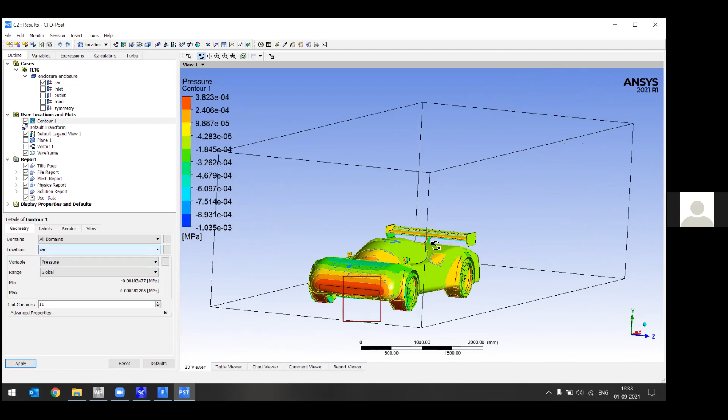These are the different contours that we can observe. Then I'll hide the contours. You can create the streamlines. I'll directly create it on a volume; you can create on a plane as well. Start from, you can select plane.

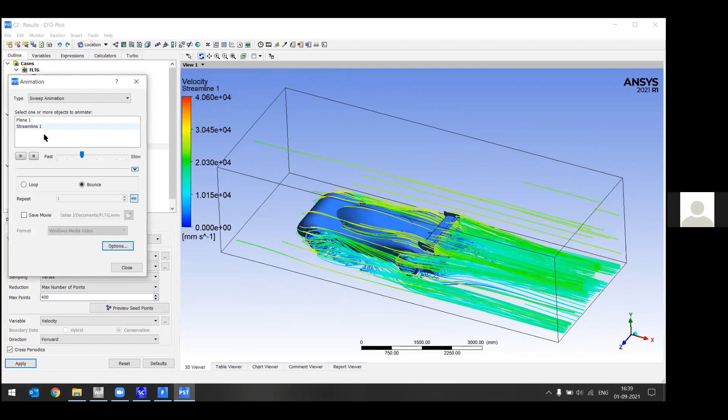I'll just select the complete enclosure. Let's say 400 streamlines and click on apply. So the streamlines are created, and you can see the animation for this. Go to the animation, select the streamlines, reduce the speed and create the animation. So you can see this is how flow or air is moving around this vehicle.

You can even save this animation in the save movie option. So for presentations or any other purpose, you can change the symbols of the animations. Like it's a ball, so in the options you have the option to change it to any other part, like this. You can see these options are all available.

Apart from that, if you want to put certain data, like generally in a wind tunnel when you are doing testing, you put certain pressure probes or velocity probes at different locations where you wanted to find out the pressure variation after the body. So that can also be done over here. You can put a probe like this at any location; you just need to give the coordinates, so it will be automatically created at that location. You can get velocity as well as pressure, or different results can be found out.

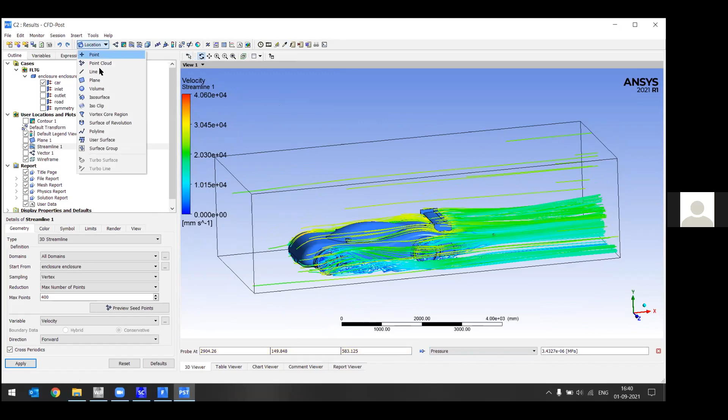Similar to that, if you wanted to create plots at different locations, you can create a line. I'll just hide the streamlines and give the exact coordinates. I'm not aware of the exact coordinates, but I'll just do the window selection; you can give the exact coordinates over here. Let's say I'll start from this side.

Okay, I'll enable the plane, and take the line command. I'm just giving it randomly from the window, but you can easily create it by your own, like by giving the exact coordinates. I'll create one more line at this location.

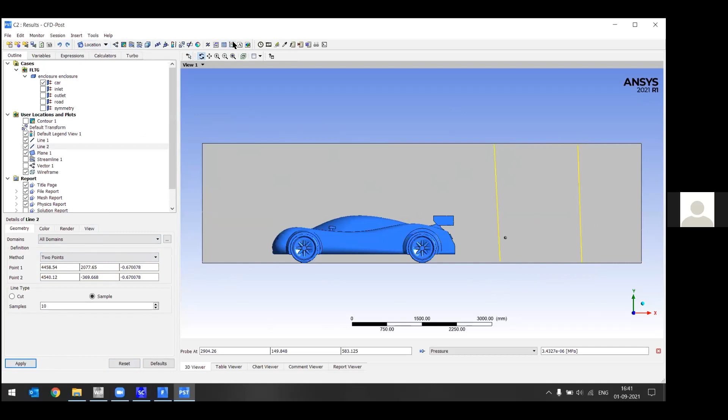On this we can plot the different results. Go to the chart, give the title, then add series line 1, and a new series for line 2. Along x, let's say you want to find the velocity profile, name it velocity, and along y, let's say vertical distance, that is y.

Just plot it so you can see the velocity variation, and if you want you can create another one. I'll duplicate this and take it as pressure variation, because when you go for publication, you can have this comparative data, and you can put it.

You can also take it to the Excel sheet. Click on export, and you can export at the given location with the help of Excel sheets. I'll give it a number and save it. So you can take it to Excel as well, use it for any further post-processing, or for plotting comparative data. That is also possible, as you can see.

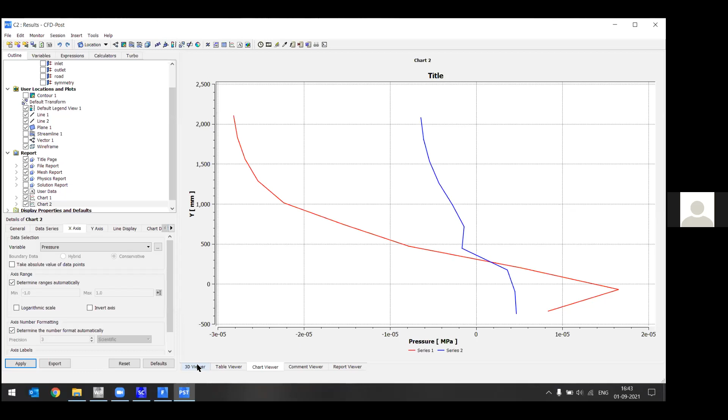I have taken almost 13 minutes extra from you, but that was worth 13 minutes. It was a very nice session, I hope all participants agree with me. If any other doubts are there, we can spend a few minutes, or otherwise we can close the session.

Anybody is having any doubt?

Can we do such kind of analysis in Autodesk Fusion 360? Sorry sir, I don't know, I cannot tell about another tool. Yeah, we can do, but we have limited access to limited tools in Fusion 360. Those tools are not that convenient for various types of simulations and post-processing, different turbulence models and many things. That makes this tool better. I'm not praising it, but I have also been through various tools, so I can say this can be one of the better tools for various simulations, not only for external aerodynamics, but plenty of simulations can be done in a single tool.